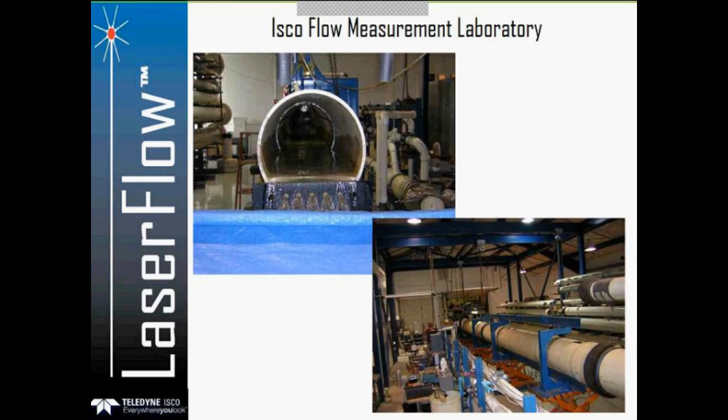So let's talk about area velocity flow measurement. Some of this will be review for those of you who have attended in the past, but it doesn't hurt to go through it again.

Area velocity: Q, your flow, is equal to the area of the water, normally determined using a level measurement technique, either a pressure sensor or an ultrasonic sensor. Velocity is your V component, normally done these days using a Doppler principle. Today we'll talk about a couple different types that Teledyne Isco has. One is what we call contact, which can be one of the older 2150 sensors or the newer 350 area velocity sensor, a smart sensor. We'll also talk about non-contact, meaning laser in this case.

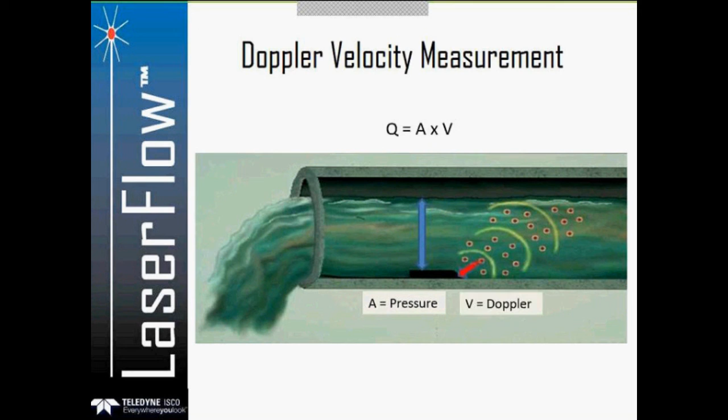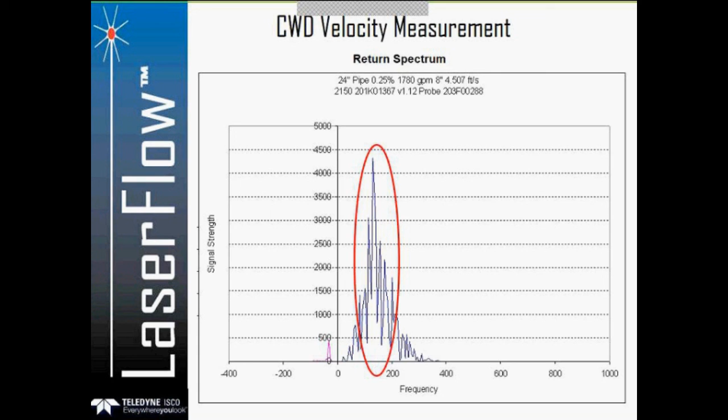For our Doppler velocity measurement, basically a sensor is on a ring in a pipe. We need to measure our level, which we do using a pressure sensor. We transmit using a continuous wave Doppler sensor, and what we get back is something that looks like this. You don't see that with the naked eye, but in the software you can see some of this - it's the frequency shift from what we're getting back from a continuous wave sensor. We trim off the front end and back end of that signal and do a weighted average of what remains. This has been a very good method for measuring water velocity and flow in a channel, but it does have some limitations, which I'll talk about in a minute.

The 2150 was designed to be a modular system, so you could stack up to 4 modules. If you had an application where you needed multiple sensors in one manhole, you could just stack up to 4 AV sensors or modules to do that.

All of our meters are battery powered, and can be battery or AC powered. We do not require you to buy our proprietary batteries - these are all off the shelf, either alkaline lantern batteries or even deep cycle batteries.

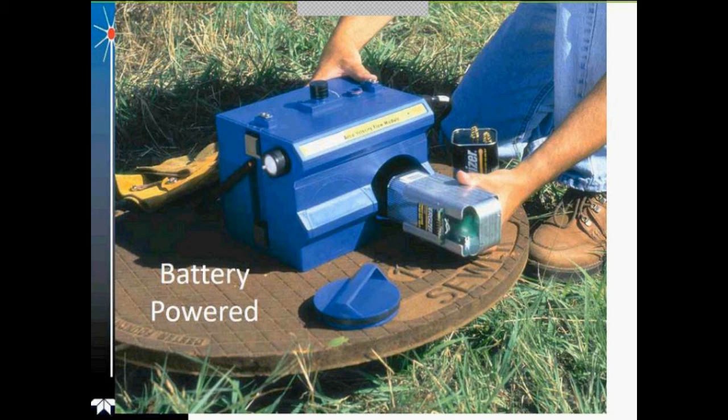Continuous wave Doppler: some of the advantages are that they work very well in depths typically lower than 24 inches. The signal of a continuous wave sensor gets scattered as it moves further from the sensor itself, so as you get deeper flow, your accuracy will decline. That's true with Isco, and true with anybody else's continuous wave Doppler sensor. For that reason, we know we'll be in the 5 to 10% accuracy range when depths are typically lower than about 24 inches.

Because we're shooting a shotgun pattern out, we get a good approximation of the velocity of the water. These are low power consumption units, can be portable or permanent, and are typically lower cost. Disadvantages: you have a sensor in the water, so there's debris issue potential, ragging, or damage to the sensor in cases of stormwater or CSO. Periodically, you'll have to calibrate those sensors.

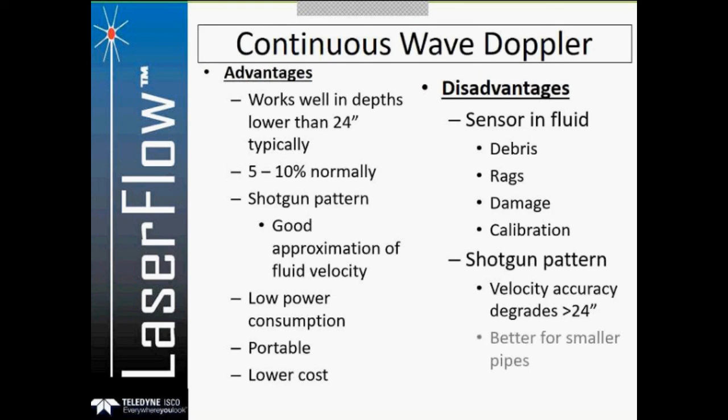We use, again, a shotgun pattern. It does a great job of giving you good fluid velocity, but it has limitations when you get above 24 inches. That doesn't mean you cannot use an AV 2150 or a 350 in a big pipe—people do it all the time—but you need to be aware that your accuracy will not be great when you're in a 10-foot pipe and 7 feet deep. For that reason, they're better suited for smaller pipes.

So that's the continuous wave sensor technology. Now I'll talk about the acoustic Doppler flow meter, or ADFM. Some of you are probably familiar with this—it's been around for quite a while. What it does is use a sensor with 5 different crystals on top. 4 of them measure the water velocity, and the one in the center measures the water depth.

If you look at this, this is a theoretical velocity profile, with levels measured right in the middle using an upward-looking ultrasonic. We're able to dissect the flow into multiple bin velocities to get a velocity distribution or velocity profile. These are probably one of the most accurate technologies we know of in open channel.

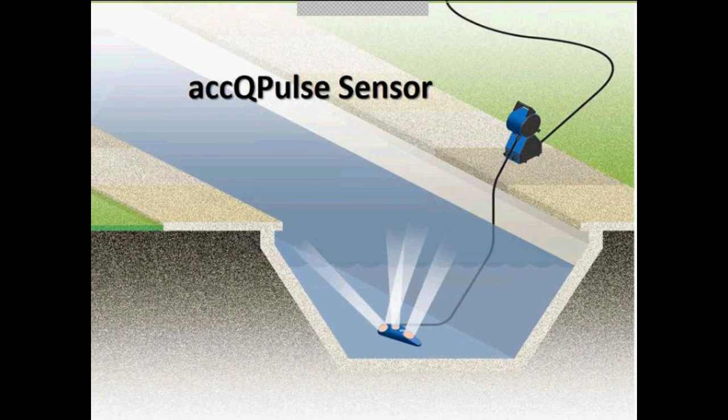This unit will eventually be phased out and replaced with new technology called the accQPulse. The accQPulse is a 3-sensor design as opposed to 4. It uses a forward-looking velocity sensor, transmits up through the water column, and dissects the flow into 9 different velocity bins in shallow water mode. When the water exceeds 30 inches, it goes into what's called deep water mode, and can do a much more in-depth velocity profile.

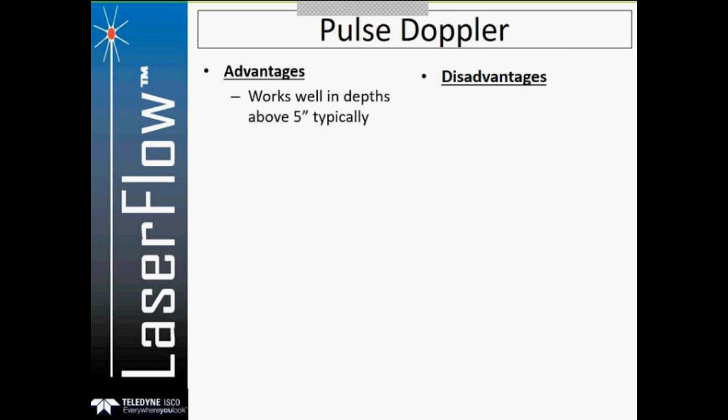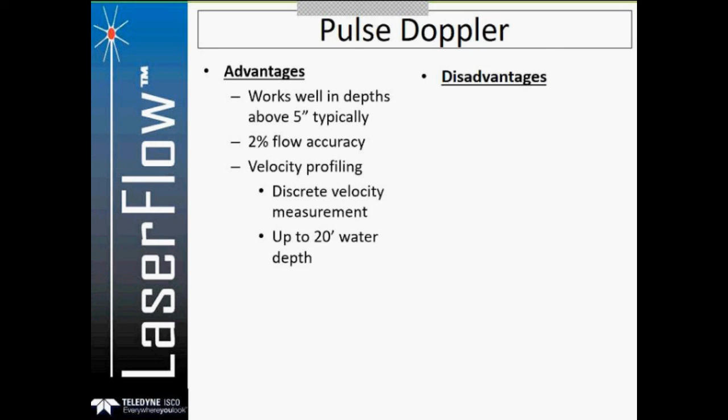Some advantages and disadvantages of pulse Doppler: you need about 5 inches minimum on the large pipe unit. The AccuMin, which is an AccuPulse with a small sensor, can read down as low as 3 inches. These are flow accurate to 2%, the best in the industry for open channel. They do a complete velocity profile using discrete velocity measurements—nothing else does that. They can read up to 20 feet of depth, both portable or permanent, and use a non-drifting ultrasonic level sensor.

No calibration is required. Once you set that thing up, you're pretty well done.

Some disadvantages: you have to have the sensor in the bottom of the channel. And when you do that, you have the obvious challenges: debris, ragging, potential damage to a sensor, and you're going to need a little more water flow. So you need at least 5 inches, preferably more than that. They're going to cost a little bit more than a standard continuous wave Doppler, and they're going to use more power.

All right, so that is Isco's contact sensor technology. What we're going to talk about now is non-contact. Why would you want to do non-contact?

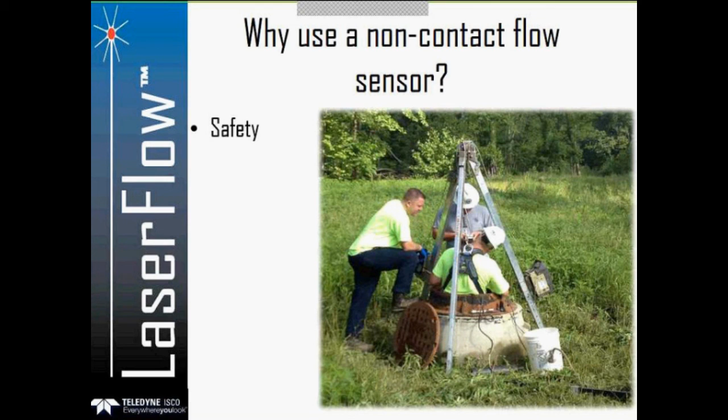With non-contact, obviously safety is a big issue. You don't want to be in that manhole any more than you have to. Maintenance is also a potential issue. Nothing's going to work if it's covered in this kind of debris.

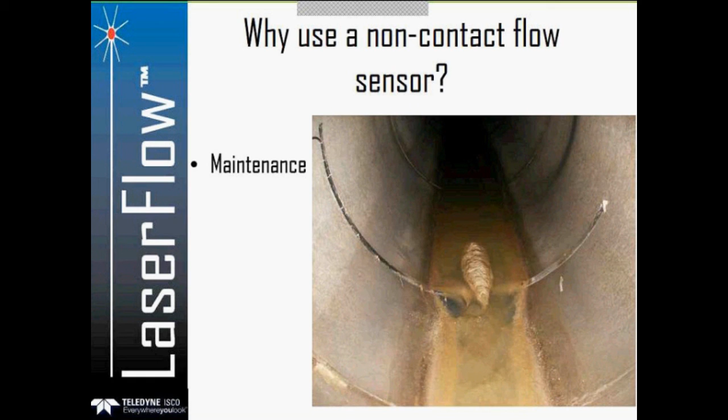So what Teledyne did is we developed a product that we feel will really unlock the door to a successful monitoring program, and that is called the LaserFlow.

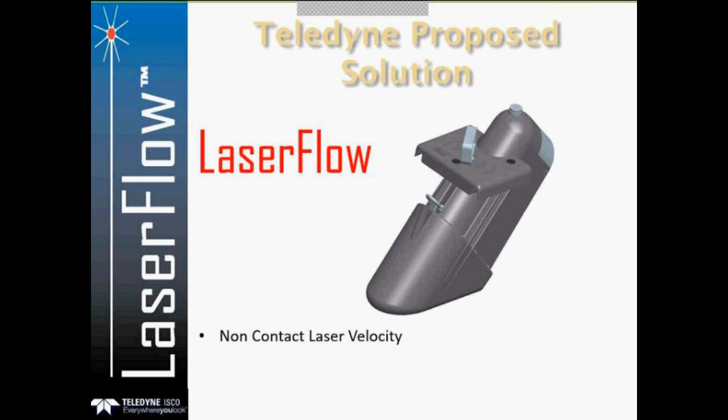The LaserFlow uses a non-contact laser velocity sensor, uses a non-contact ultrasonic level measurement technique, and then when it does become submerged, it uses a continuous wave Doppler sensor to read the surcharge.

So, the theory of operation: there is an ultrasonic sensor in the upper back that is at a slight angle. It transmits off a 22.5-degree deflector, knows where the water is. Once it knows where the water is, it focuses the laser beam below the surface of the water.

This is very key and unique to Isco and the laser. This is also a very patented feature. So nobody can read subsurface velocity measurement with the exception of LaserFlow.

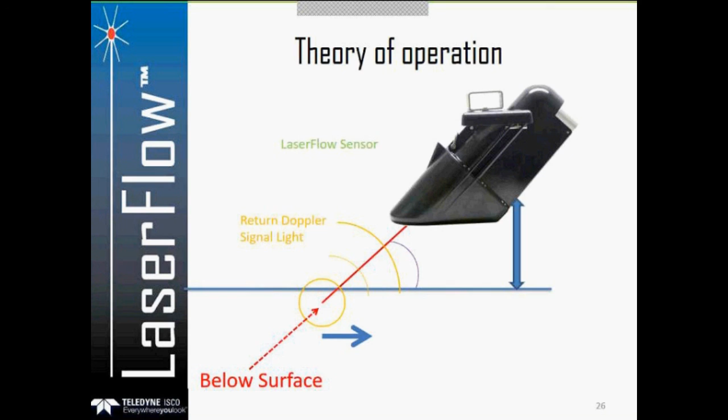Before I get into the laser operation, I'm going to talk a little bit about the ultrasonic. One thing we looked at when we designed this was what the other guys did well, and maybe areas that we can improve on our design. So one of the things was the ultrasonic sensor.

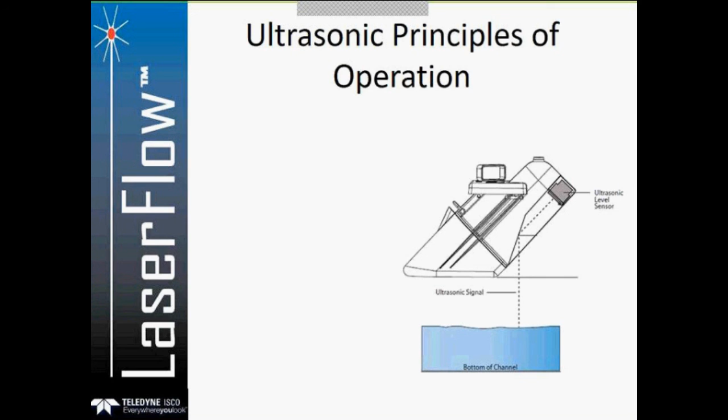If you have an ultrasonic sensor that's mounted looking straight down, you can have the potential for condensation to drip off the nose or face of that sensor. What we did with the LaserFlow is we angled it, put it in the back of the sensor, and now any moisture that accumulates will just run right off it, whether it's moisture in the manhole or becoming submerged.

We use, again, that deflector plate. One of the reasons we do that is any ultrasonic sensor will have a deadband, including ours, and that's normally about a 12-inch deadband. With this design, we've eliminated that deadband because now it's taken into account in the sensor position. We can read all the way up to when the laser goes underwater before it will hit the deadband of the ultrasonic sensor. We have a 0 to 10 foot range, so the thing can be 10 feet above the minimum depth of water flow.

So we did, I think, a really good job on the ultrasonic. Very rarely do you have to do anything with it. So water level comes up, submerges it, goes back down. It should kick right in and start working. Okay, so that's the ultrasonic.

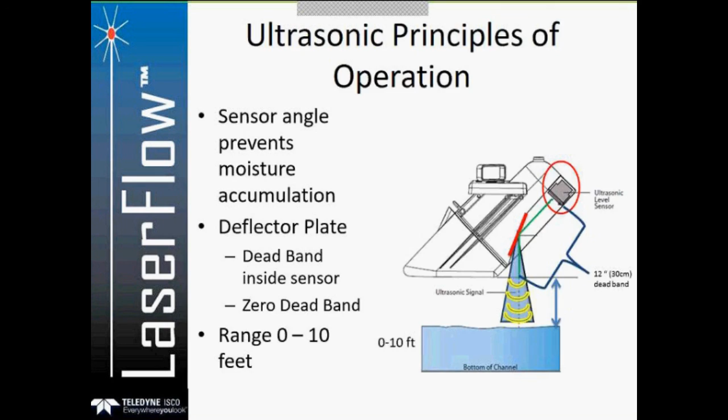The laser works kind of like if you took a magnifying glass and moved it until you got a small point on your hand where it started to burn. Very similar to what the laser does. We know where the water is and we focus the laser at the appropriate point. Any signal reflected off the laser will be looked at basically, but most of it will be weak and not even processed. So anything on the laser beam will be reflected.

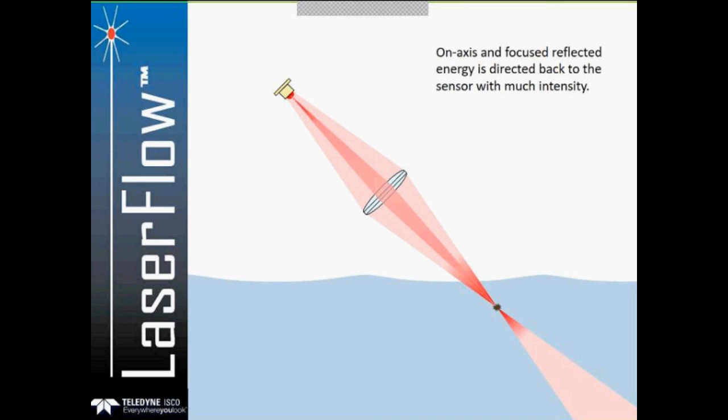What we are interested in is the focal point, where we are actually focusing the laser, where we get our maximum signal reflection back to the laser sensor. It works like any other Doppler device: we transmit a known frequency, we know the frequency shift of what comes back, and that's how we calculate the speed of the water.

So, to give you a better idea: front view, side view, we do a level measurement, we know where the water is, we focus the laser below the surface of the water. Where we focus that laser is known as the converging section, or point of convergence. What's unique about the laser is when we take that reading, we take 5,000 velocity scans in 2 seconds, so it does a very detailed analysis of what it's getting back in a very, very short amount of time.

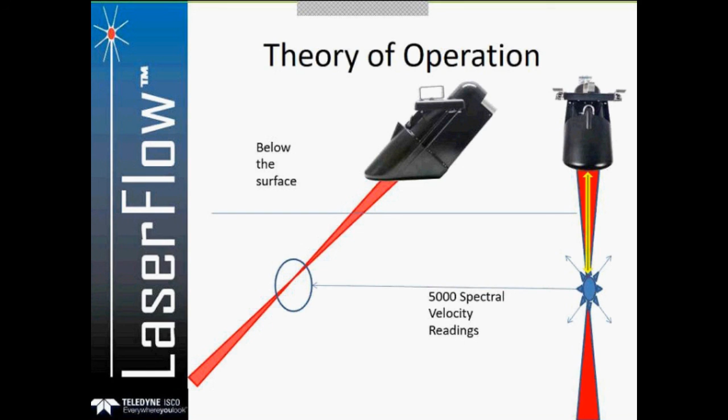For those of you that may be aware of Laser version 1, which was released about 4 years ago, that signal took about 45 seconds to process. We did some changes in the firmware and some other things. Some of the engineers did a great job, and now it does a lot in a much shorter time. So incredible what the laser does.

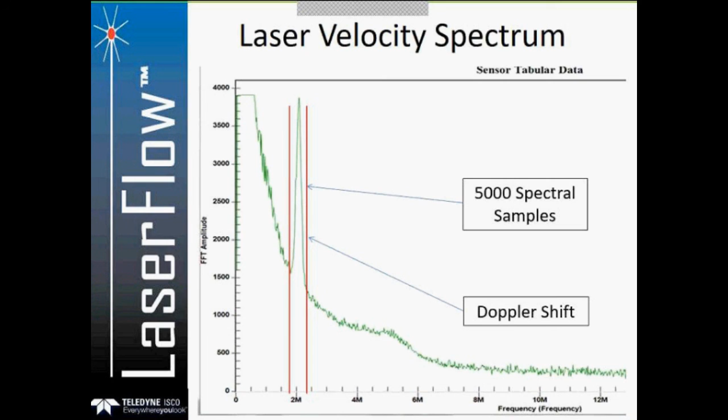We slice off front end, back end, and we end up with something like this. This is a new laser. If you got one today, your signal would look like this. What's key about this is our Doppler power, which is really a measure of signal to noise ratio, is incredible. As this water slows down, that peak you see would shift to the left.

The first version laser would not read below about 0.8 feet per second. The current lasers now are spec'd to a half foot per second, but in this case, we can read much lower than even a half foot per second—again, a measurement of the quality of the reading. This value, Doppler power, is stored as a data point, just like level or velocity. We need to see a value greater than 1,000 in order to consider it a valid reading.

So with any other Isco flow meter, we are really, really big into diagnostics. We not only want to give you a nice, pretty graph and a good-looking set of data, we want to verify and be confident that the reading you're getting is truly a valid reading, and the laser is consistent with that.

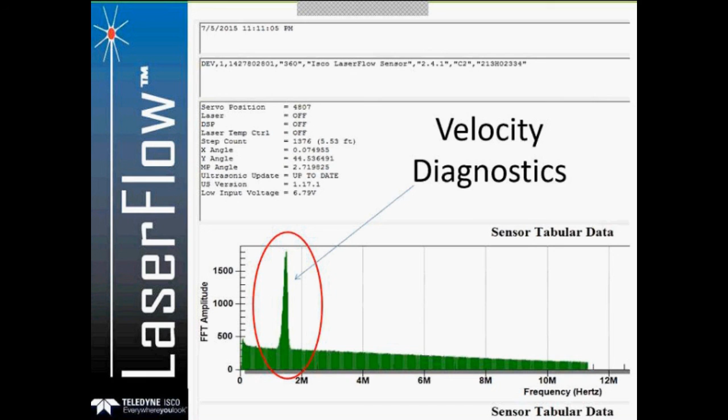In the case if it did go submerge, went underwater, water level comes back down—when I look at this diagnostic, I can see that I have no changes in the position of my sensor, and I also note I have a good velocity Doppler shift, so no reason to touch that laser. Just leave it alone. Okay, so how do we run this thing?

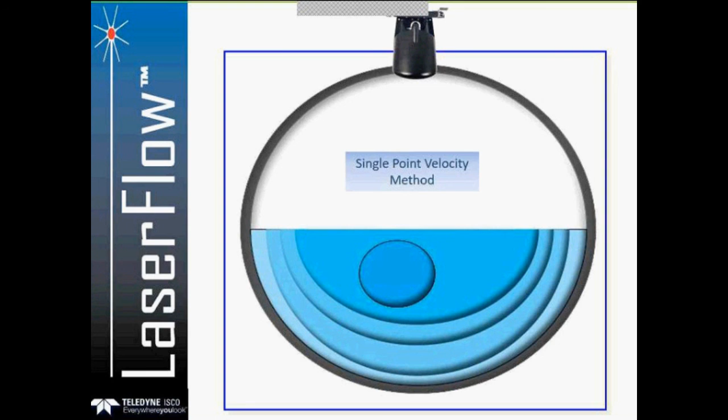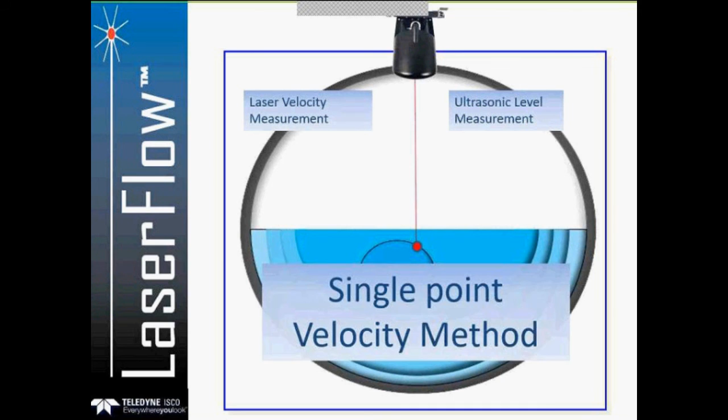It can be run multiple different ways, but one common way is what's called the single point velocity method. We read an ultrasonic level, so we know where the water is. Once we know where the water is, we focus below the surface of the water. At that point, we're taking 5,000 velocity readings.

The other way is we can take and measure multiple points. The laser can read up to 15 different points—5 points horizontal, 3 points vertical. Don't want to mislead anybody: this does not do a complete velocity profile like an ADFM. So if you have very irregular hydraulics and the bottom's moving one direction and the top 5 feet is moving the other, the laser will not see that.

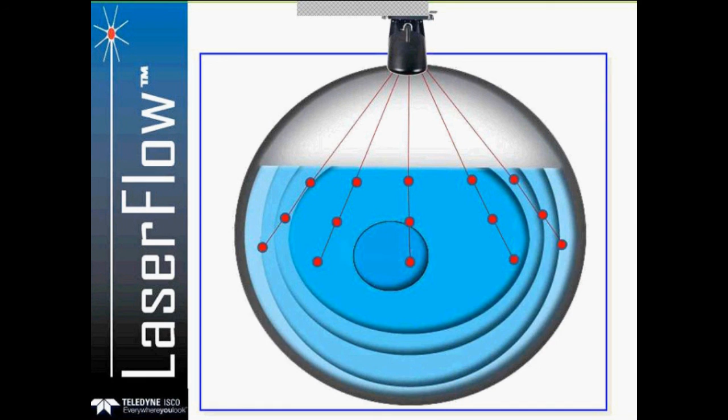So it's not going to read every application. But for the most part, in a normal hydraulic condition, your peak velocity is typically in the middle, just below the surface, and then as you get to the outer walls, it will slow down. This method is known as a multi-point, multi-depth velocity method.

So here's a site that I downloaded actually in Washington, Seattle last week, at an application where water was coming into a wastewater treatment plant. I turned on all 15 points, and you'll notice that the upper left—it starts upper left, moves across to the right—5.03 feet per second, and 4.71 to the right. Very uniform flow, so everything looks good there.

The choice for them is really power. You can run all 15 points. If you have AC power, then run them all—it doesn't matter.

In this case, they did, so we just left them all on. For billing applications, you may want to run all 15 points. If I have them on batteries, I may not want all 15, especially when it's as uniform a flow as this is. You may want to pick 2 or 3 different ones.

It's important to note that if you select 2 or 3, if they ever come up invalid, meaning they didn't like what they saw, they will not be processed and used for the velocity. It'll just be thrown out.

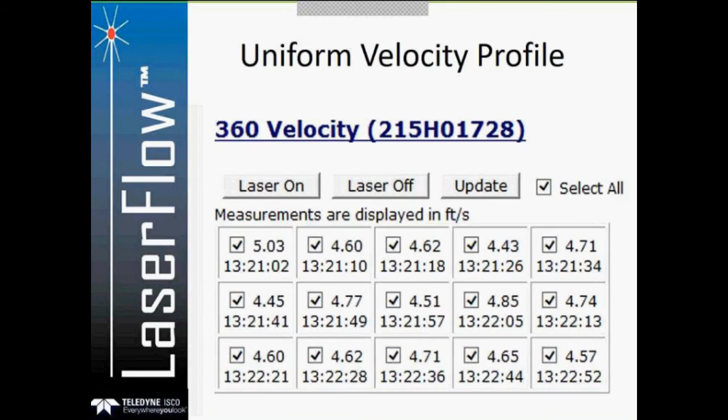So challenging. But if you had to do this, a laser is really the only thing that will give you this kind of detail. Okay, so that's the laser operation.

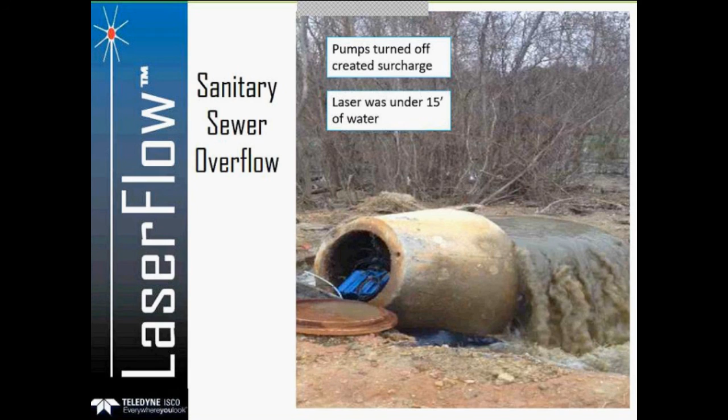Now we're going to talk about what we do when we go underwater. In this case, this was a sanitary sewer overflow. It happened because pumps at the wastewater plant shut off. The laser was under about 15 feet of water. It is rated 6 feet, 72 hours. We have lasers now that we don't recommend putting under 15 feet of water, but we do have lasers that far exceed the rating and have not leaked, so it's a very, very durable product.

So what we do is, once the laser becomes submerged, we have a continuous wave sensor like a 2150 or the 350 area velocity sensor. It is mounted upside down on the bottom of the laser face. So we read laser velocity and level until we become submerged. Once submerged, our continuous wave sensor takes over, and we read level and velocity using that sensor.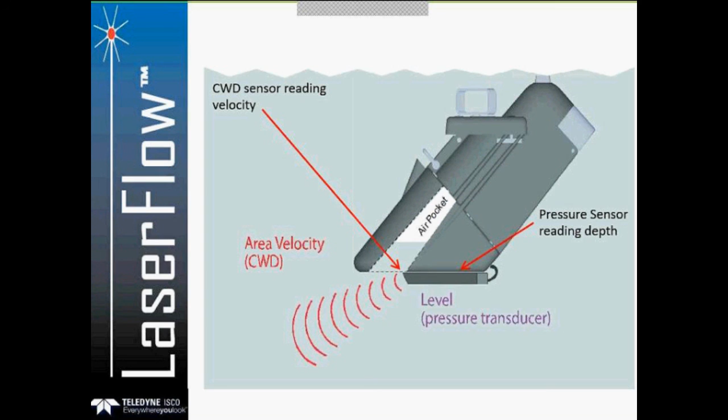All of our meters now that use laser have the ability to have a single output related to your flow. We call this a conditional flow output. What that means is it will use laser flow until it becomes submerged for an analog output or a data storage point. Once it goes underwater, it will seamlessly transition to the AV sensor. So now you have one signal regardless of which sensor you're using.

This is a site where early on we did some testing, and they went ahead and purchased one. At the front end of this peak, you'll see that's flow with the laser versus the flume. Very, very close, they matched almost identical. Once the laser went underwater, the AV sensor kicked in.

The flume actually started overflowing the sidewalls a little bit. Once the water receded, you'll see the red line as the laser flow, and the brown line is the flume. It took about 5 days before the submergence of the flume decreased enough where it started reading accurately again. So they had one signature meter processing both of those, giving them good, accurate data regardless of what was happening at the plant.

This is what the sensor looks like when it's mounted. It is retrofittable in the field. You can order it with this feature, or you can add it later. It's no big deal to do that.

Some of the ways that you can install this - a typical installation has just 2 bolts that hold the mounting bracket in place. There are alignment tabs on there, and those are designed so that once you get it installed the first time, you can pull the laser above without going into the hole, and put it back down without going back into the manhole.

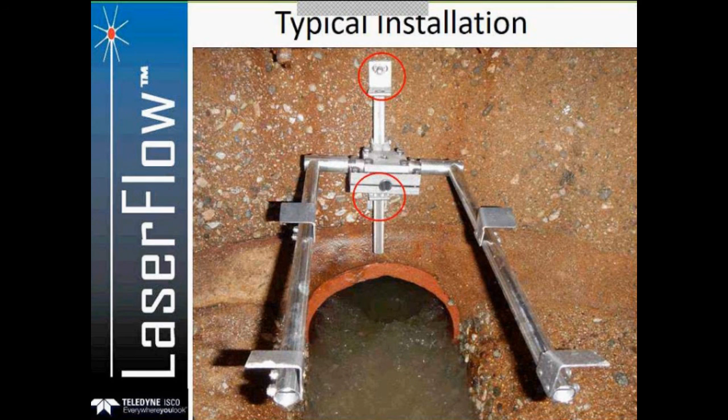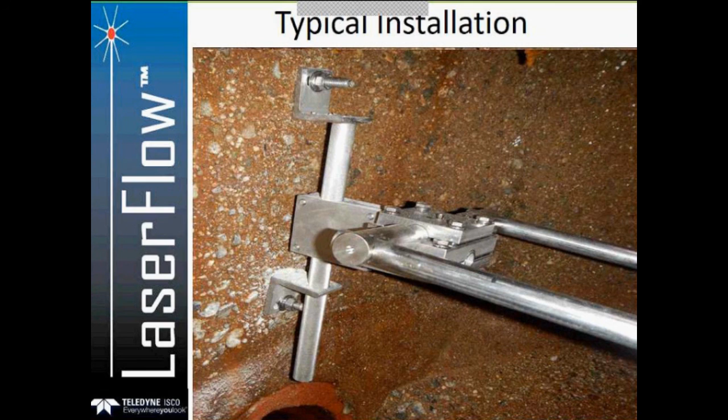This is a side view of the same thing, so 2 bolts, very easy to install. It is designed so that you can adjust the pitch and roll. You can also raise and lower the sensor. Normally you'll mount it at the crown of the pipe, so the sensor itself typically is mounted with the bottom of the laser close to the crown of the pipe. That way, if it does become submerged, your AV sensor is looking into the flow and you're going to get an accurate flow condition.

Okay, let's talk about some applications where we use laser. Collection systems, we define those typically as large pipes. When we first came out with laser, that's what we were thinking a real target was, large pipes. Since that time, we're finding a lot more small pipe applications.

So again, collection system, typically you're going to see some large pipes, billing applications. City of Atlanta, some of those big cities use a lot of these for billing. Hydraulic model calibration, that's another big one that we're seeing more and more of.

Hydraulic models typically are involved with large interceptor lines, and maybe a lot of those you can't even get into the flow, let alone install a sensor down in the bottom. So you need a high accuracy, but you don't want to get into the flow.

Stormwater, we're seeing more and more stormwater applications where lasers are being used. They can read extremely clean and very, very slow flow. That is one of the latest things on laser that I've learned over the last probably 6 months, how clean a water laser will read and really how slow it will be able to process a velocity reading.

Wastewater treatment plants, more and more wastewater plants are using lasers. Nobody wants to get into the influent and the effluent as well. So influent, effluent wastewater plants, grit chambers, things like that where you don't want to get into the flow.

We've done a lot of testing over the last year and a half, comparing laser to some standards to be able to say here's how accurate. Everybody wants to know how accurate you are. What we have here is a tow tank test done with USGS HIF lab, and you'll notice that the laser, in every point that we tested, was within 1% of the tow tank. So it did really, really well in the lab.

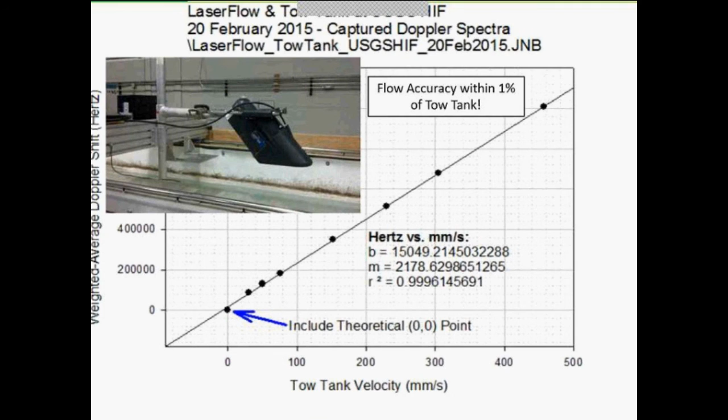We have other test results from other independent labs like the Cal Poly San Luis Obispo irrigation facility and some other things. So we can certainly provide some amazing data. But all the lab data in the world is great - what you really want to know is what's it do in the field.

So we ran the laser in series with a number of different types of technologies. This is a multipath transit time meter. What this has are multiple sensors on a ring that basically transmit across and talk to each other. These are known to be very accurate technologies.

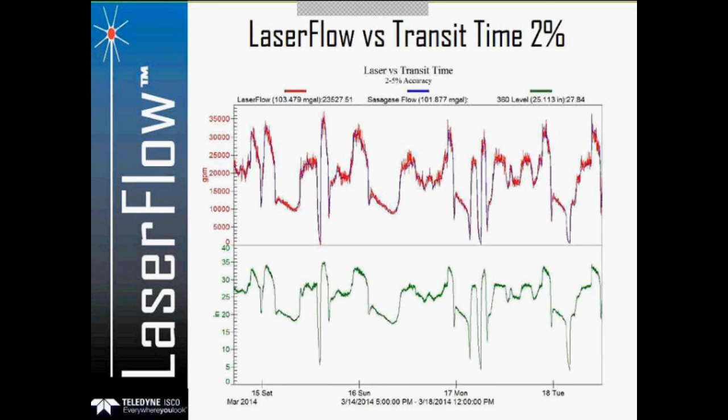This was a test done in Japan comparing to a transit time meter. The top pane is flow rate, red is the laser, blue is the transit time meter. The bottom pane in green is the level. So it didn't matter if the level was 5 inches or 35 inches, they tracked well within 2% of each other. Okay, so that was transit time.

We talked about acoustic Doppler or range-gated Doppler earlier, and we've done a lot of testing on this as well. This is the accQpulse versus the LaserFlow. This was done with City of Omaha, and you can see in the top pane, blue is the accQpulse, red is the laser, is level, velocity, flow rate.

The bottom pane, again, is what you're really looking for. We were well within 1% of the accQpulse. So it did very, very well. If the hydraulic conditions are uniform, they match very closely.

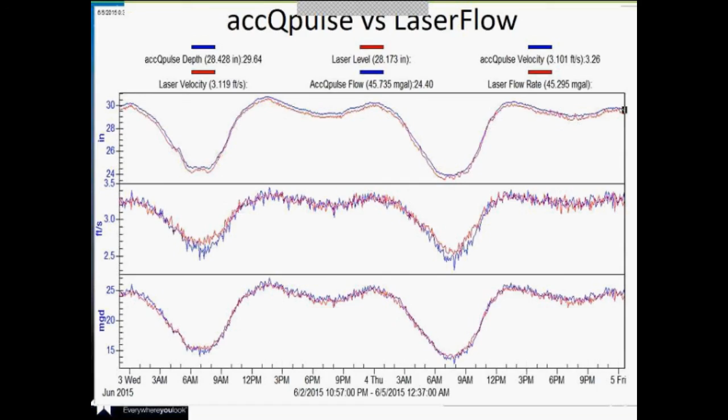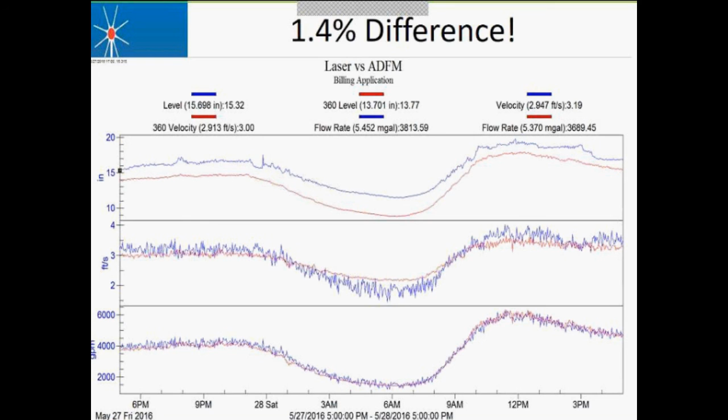This is another test we did. If you look at this data, we were within 1.4% of the ADFM. Again, different actual pipe sizes, so there's a little bit of difference in the hydraulics, different flow patterns, a little bit of difference in the velocity as well as level, but the flow output was identical.

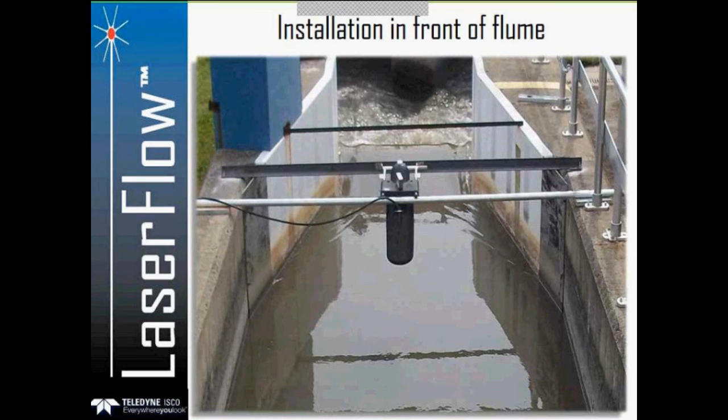We've tested in applications where we've compared to flumes. More and more people are questioning the accuracy of the flumes. I will tell you right now that the more I work with the laser, the more I'm confident that in the next year or two, people will be using the laser to verify their flumes are reading accurately. A lot of things happen with flumes: the approach velocity is too high or too low, the size of the flume is wrong. Other things can make a flume not necessarily the most accurate device.

In this case, they had a signature meter using an ultrasonic to measure the level of flow in the flume, and they use the laser upstream. When it submerges, it automatically switches to the laser. This is the flow data between the flume and the laser, tracking very, very close. We all, I think, agree that flumes can be within about 5%. In this case, they track very, very close.

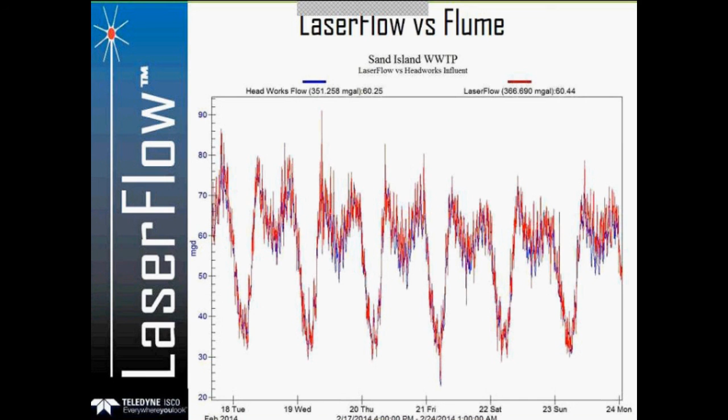Flexibility. Some of the things we do, again, is signature, our smart device. This signature flow meter will allow you to connect multiple sensors, up to 9 technically. In the case of laser, we'd probably hook up 2, maybe 3, but normally no more than about 2 lasers on one. But it gives you a lot of capabilities. We can take in other technologies that have Modbus output, analog outputs, and so on.

But the communication side of the signature is impressive. It can transmit data using a cellular modem. We can also allow you to download using a USB or a thumb drive. You can use internet, again, to call up the site, analog outputs. We have alarming capabilities and so on. So very impressive, that's the signature.

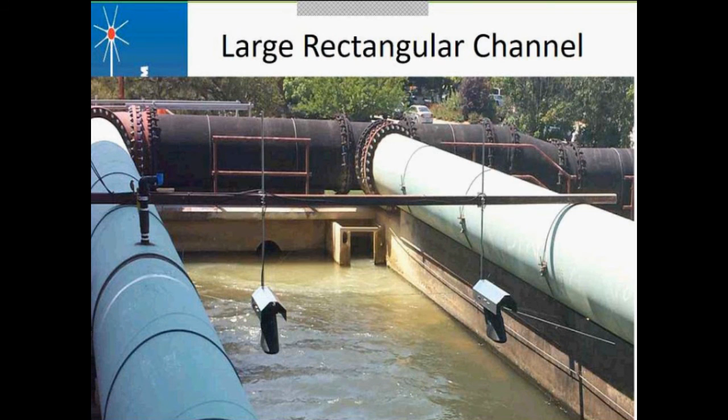This application is a large rectangular channel. This was actually a drinking water facility in Kansas, and they knew their flows were not very uniform. It's about 20 foot wide, so they went ahead and installed 2 lasers, both kind of splitting it in half. We set the flow conversion up so one sensor has 10 foot, the other has the other 10 foot. Both of those are processed in the signature and give you one continuous output for both. So you can average those, add them together, whatever you want to do with it. Very powerful tool in these types of applications.

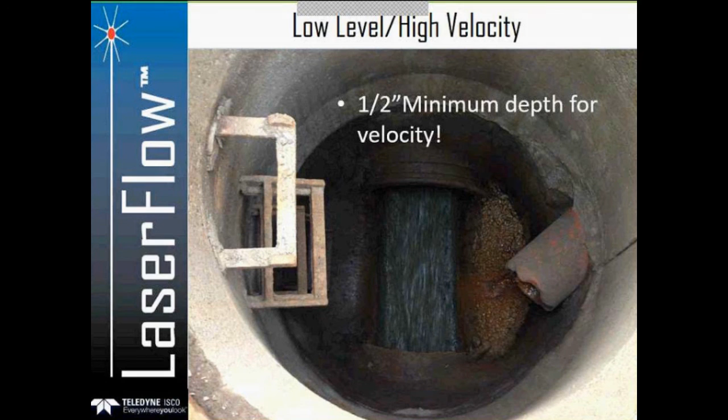Low level, high velocity, more and more of these types of applications. It's very, very difficult, if not impossible, to install a pipe or banded sensor in this type of application. Currently our spec is a 1/2 inch depth for velocity, although we will read, in the case of the laser, as far down as it can read level. So it's going to read down - in a lot of cases I have them below even 1/10 of an inch of level. Our current spec is 15 foot per second for your maximum velocity.

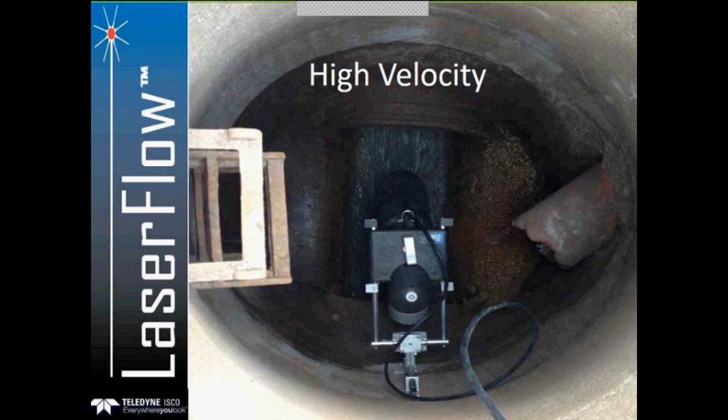The way they did this in this particular location, this is actually Duluth, Minnesota, very high velocity, low level, almost impossible to read. They went ahead and put a laser in there. The laser doesn't care if it's pointed upstream or downstream. It can mount on the front wall or back wall, so very flexible as far as installing. Once you put this in, you know the XY axis, you know if it's installed correctly. There's also a bubble level in the back, so very, very easy to install, much easier than installing something in the pipe.

This is some data from a site in Colorado. What's interesting about this is the level in this pipe is about 21 inches, and the velocity is screaming, 11.26 feet per second. This is a very difficult, if not impossible, site to measure without using laser.

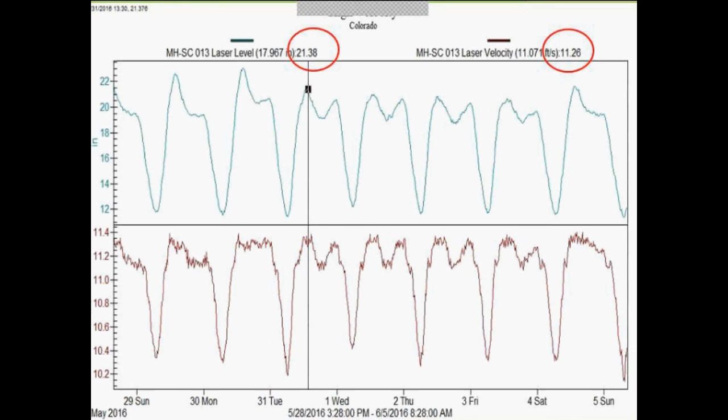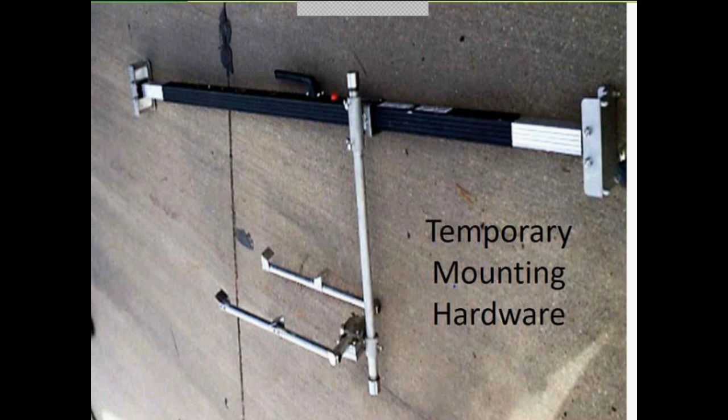This is a temporary mount. This is a hydraulic mount that we use. If you want it to go temporary and don't want to drill any holes, you can just crank that out. The sensor mount is at the bottom there.

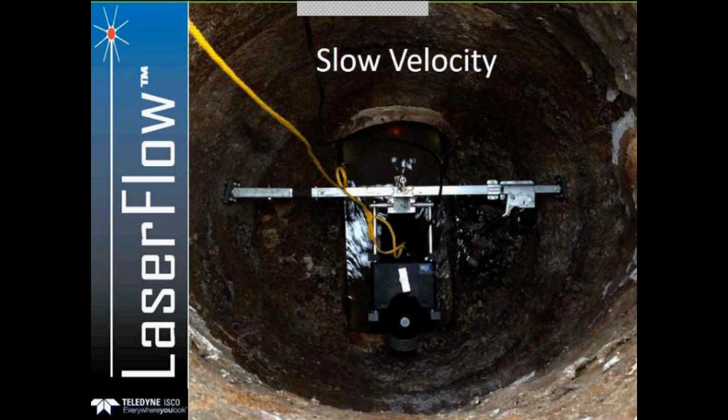This is one where they used a competitor's mounting device, but what's impressive about this is the slow velocity that we're able to read with the laser. You can see the laser beam on the water itself. Our spec is a half foot per second, which is where the dashed line is. In this case, we were reading down to 0.39 feet per second velocity, very, very slow.

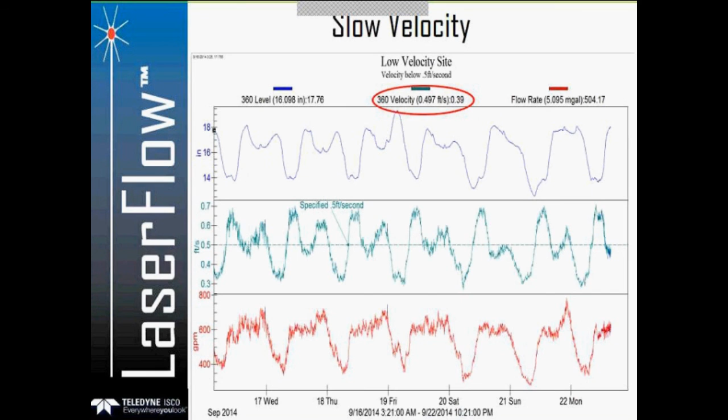Stormwater. This is a site out on the East Coast. The customer was struggling to try to read this. This is stormwater, the water is crystal clear, and it is barely moving. There is very low velocity, very little particles in the water, and very low level. We put the laser in. You can see the beam on the water right there. This is actually a 72-inch pipe. And what you'll see in this case is that particular point right there, my reading is 0.76 inches at 0.26 feet per second. So just a crawl of velocity and below 6 gallons a minute.

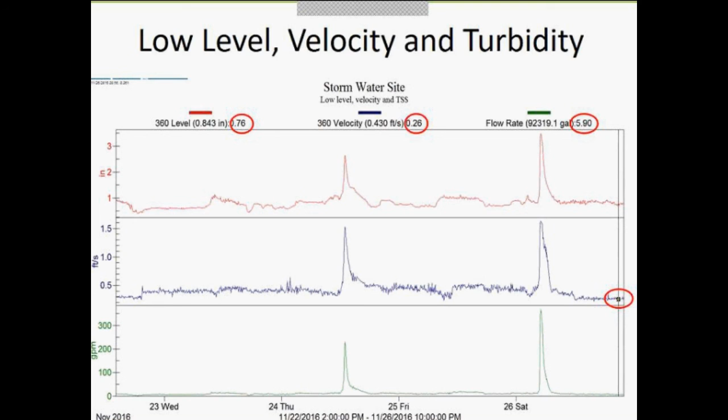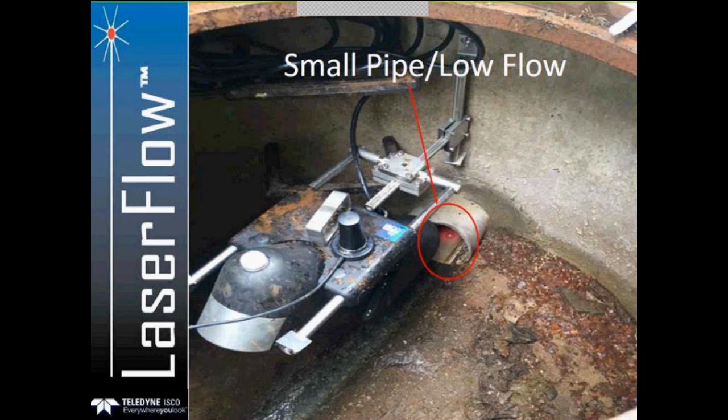Amazing what the laser is able to read. Here's another one, a billing application, very small pipe. We don't care if it's 6-inch or 4-inch, we just need to see water. And again, in this particular application, you can see the laser hitting the flow, but there's not much water going through this. So it may seem like overkill sometimes, but if you have an industrial customer that wants to measure flow and doesn't want to mess with it, just put it in and be done with it, the laser is a great solution for that.

This is some of the data from that site. The level in that dashed line is below 1 inch. Velocity is anywhere from 2 to 6 feet per second, which is incredible. In this case, when I looked at the data, I wasn't sure how accurate it was. My Doppler power value was greater than 1,000, at 2912. I know with confidence that the reading it took right there is accurate. And the flow rate, amazingly, was less than 1 gallon per minute. Unbelievable that it's able to read that.

Okay, another application challenge: drop pipe. This is a customer wanting to measure flow in this pipe. So as you probably recall from my training just a few minutes ago, your level normally would be read below the laser, and it would try to read velocity in the pipe. That wasn't going to work so well. So engineering came up with a solution where we can actually remove that sensor. You order it that way, and we put the ultrasonic on a horizontal mount that now will read in the pipe, reading the level and velocity in the same location. That's going to do a couple things.

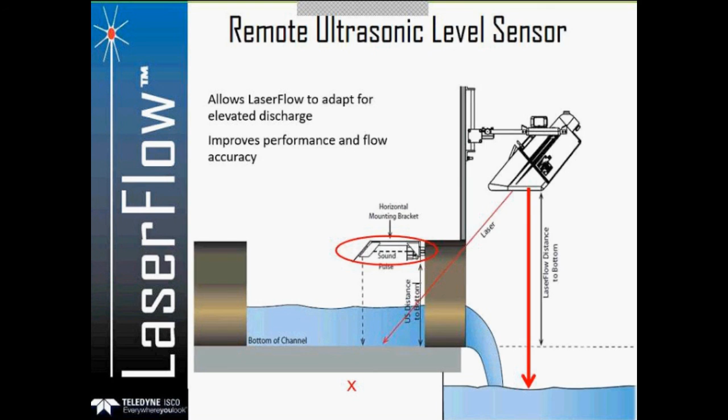It's going to allow you to read those locations, but it's also going to improve your performance and accuracy overall. This is a site with a combined sewer overflow. You'll notice the water is kind of flowing out and dropping a little bit. With the first laser, it would have tried to read below it, and not working well with a lot of water there, it would have had some problems. We use the remote ultrasonic, and now it's able to see the level in that same location.

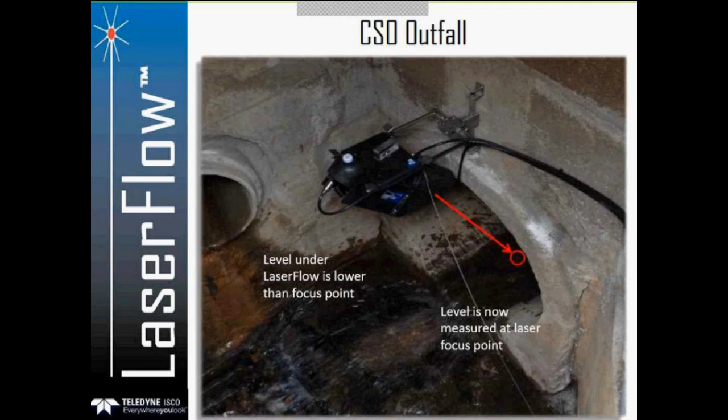This is a big pipe. You'll notice the water free falls out of that, but then it comes into a big irregular channel, so we've got a very undefined location. What they did is they used the remote ultrasonic mounted up in the pipe, and now they're reading level and velocity in that round pipe where the hydraulics are much, much better.

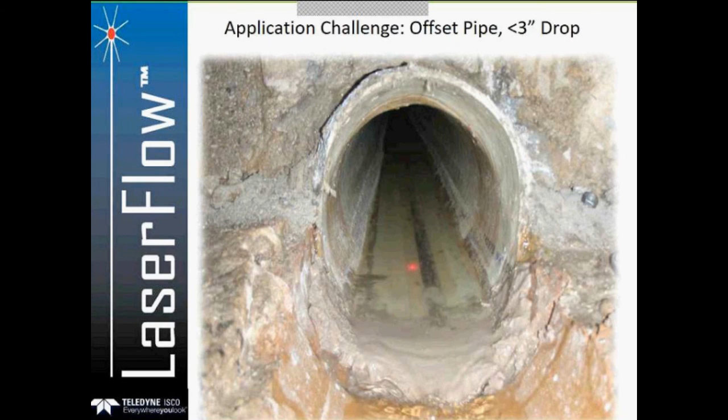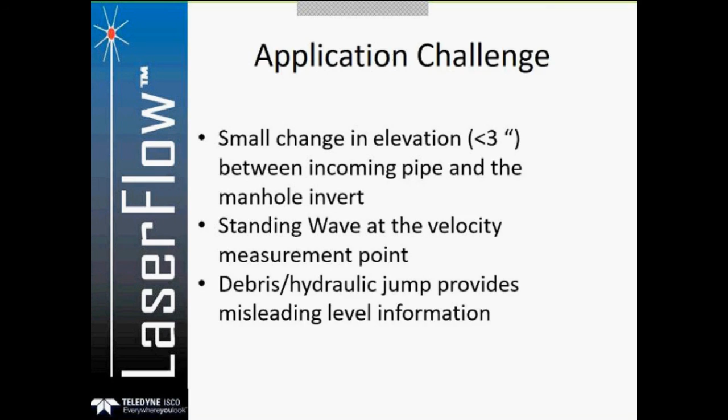If you have a condition that looks something like this, where they have a grouted pipe with maybe low flow, the laser wouldn't work so well. Basically they had a 3-inch change between what was coming into the pipe and the invert. They also had standing waves and other hydraulic issues. So the laser has the ability to do what's called adaptive focus. It knows where it would normally look for the flow, but it will scan 3 inches above that point all the way through until it finds its strongest signal, or the best signal. So it has a lot of intelligence for cases where you're struggling to get a good reading.

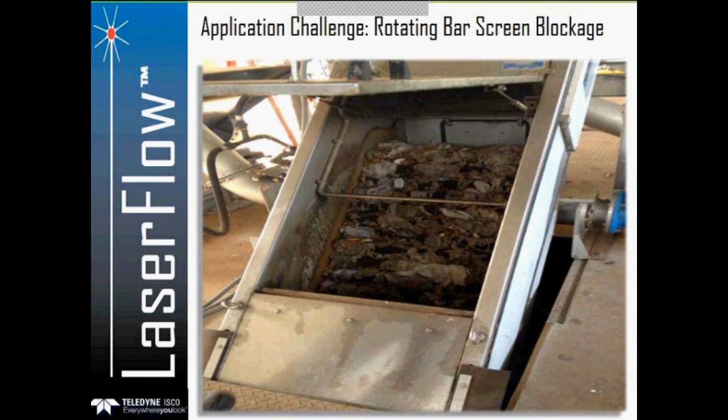This is another application where we had a rotating bar screen, influent of wastewater plants. Like I said earlier, we're seeing more and more applications where people want to do non-contact coming into the plant. This particular one is a 72-inch pipe, and the level change is 3 inches in 1 minute, so lots going on in a very short amount of time.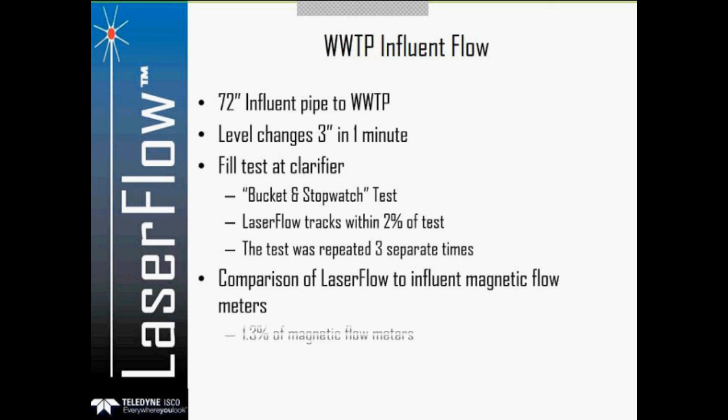They verified accuracy using the old bucket stopwatch test. They drained a clarifier, timed how long it took to fill it, and repeated that test 3 times, and every time it was within 2%. They also compared it to the influent mag meters and were within 2% of that as well. So, very impressive test. The level here you can see on top is changing 3 inches in 1 minute, so a lot's happening again in a very short amount of time. The velocity you can see is going up and down as well, and the flow rate.

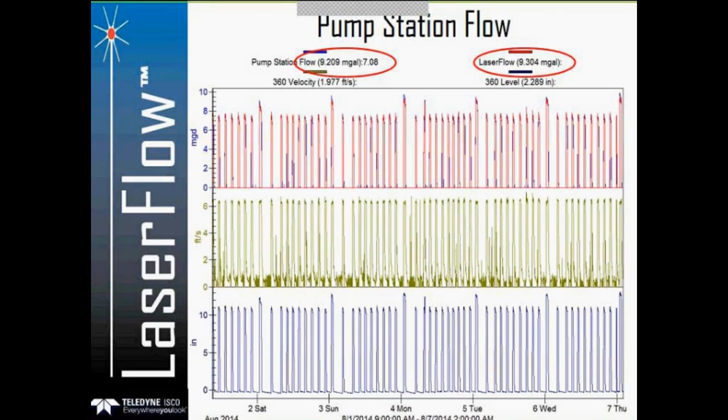We also had some tests at a pump station application, this one in Wisconsin. The customer put it on a constant speed pump station where it pumps on, pumps off. The interesting thing is the bottom pane is the level - it goes from 0 to about 12 inches with a snap of a finger. Velocity goes 0 to 6.5, 7 feet per second. But what's so impressive is the top pane, which is the flow rate, comparing to the mag meter. In blue there was 9.2 million gallons; LaserFlow was 9.3. So it's just amazing how close those two followed each other.

Okay, so let's talk about advantages and disadvantages. The laser is non-contact - nobody does what the laser does. 5,000 velocity readings in 2 seconds is just incredible. The multi-point velocity method is another thing where people who have used other technologies such as surface radar really love this capability of the laser. It will tell you exactly what's going on in those channels. We don't care if it's a large pipe or small pipe. It's always been taboo in the past to say one meter works in every application, and that still is true to a point, but I can tell you the laser is the most versatile, one-size-fits-all technology that I've ever seen in the 30 years I've been doing this.

We spec 4% accuracy for non-contact, so it's the highest accuracy spec non-contact available on the market. We do have tests that far exceed or are even better than 4%, but that is our spec. We don't care if it's a half inch deep or 120 inches - we will adapt to those conditions, so we do not have a decrease in accuracy. The laser will read the slowest velocity of anything I know of. Even though we spec a half foot per second, there are applications where we will read far below it, to the tune of less than 0.2 foot per second velocity.

Portable or permanent, doesn't matter which one you use, it uses a non-drifting ultrasonic. So really, when you put a laser in, you're done. You put it in, set the level, make sure you're getting good Doppler readings, the signal looks good, and you can monitor that remotely.

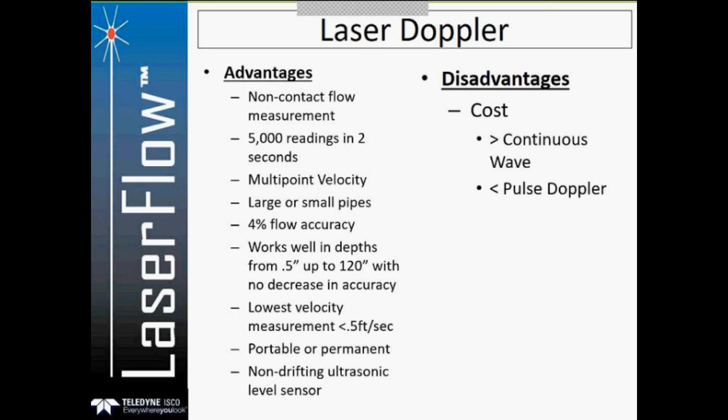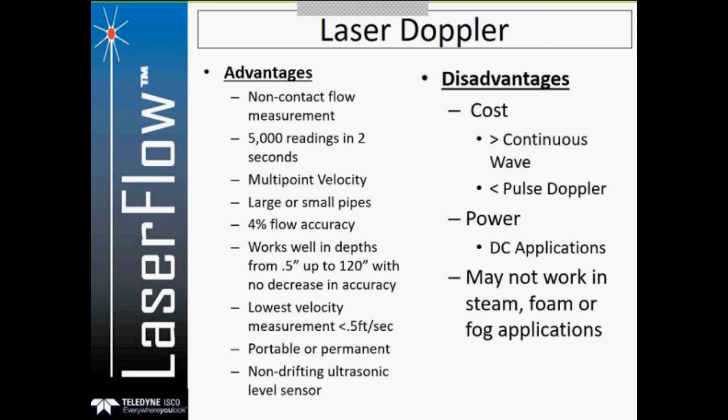For that reason, you never have to really get back into it. It's going to cost a little more than a continuous wave sensor, but less than pulse Doppler. So if you don't have regular velocity profile conditions, you may want to consider using the laser. It takes a bit more power, so for DC applications you may want to use a deep cycle battery. It may not work in some foam or steam applications, high fog—anywhere you think you'd have problems with an ultrasonic, you might want to consider that as a good guideline.

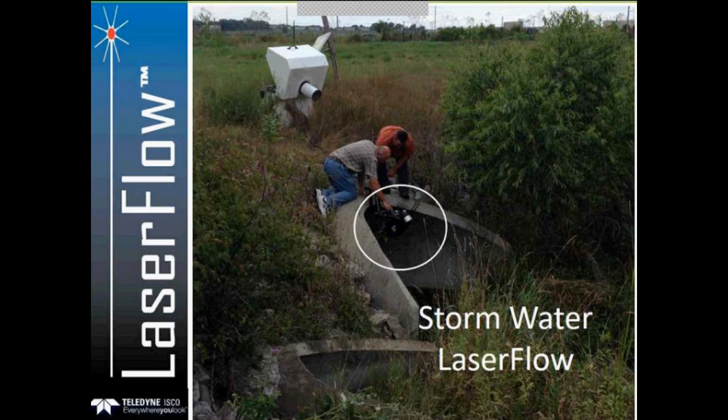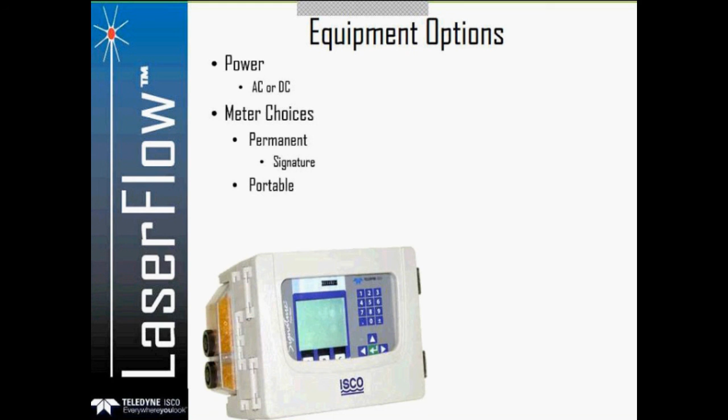Flexibility, we talked about that—laser gives you incredible flexibility. Both designs can be remotely communicated with using cellular communications, whether it's signature or a 2160. They get up, take readings, and are able to transmit the data to a central database.

The way we do it is a little different than probably some of the other ones out there. We allow you to go ahead and own FlowLink Pro, so you can buy the software. You host your own data, which means you spend the money up front, which isn't that much. You put it on a SQL or Oracle database, and the meters in the field transmit to your database. You have full control over it—you own your own data.

We don't hold you hostage for a 30-day fee like some other people do. Data goes into your database internally. Engineering people who have FlowLink on their computers can just access the FlowLink Pro database at the same time. Remotely, you can use VPN to log in and see what's going on. And now you'll be able to use remote communications to either pull up data on the internet, called FlowLink Global, or call into the site. So very, very powerful, what you're able to do with the communications.

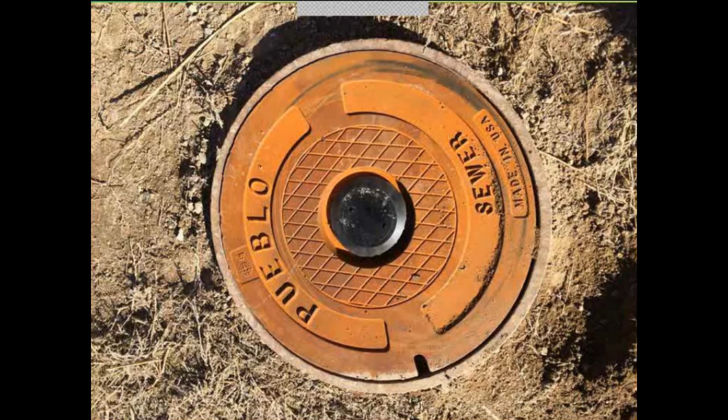This is an example of some creativity. This was Pueblo, Colorado—they had the manhole lid actually machined this way, which I thought was very neat, so they recessed that antenna so a snowplow can go over it without damaging anything.

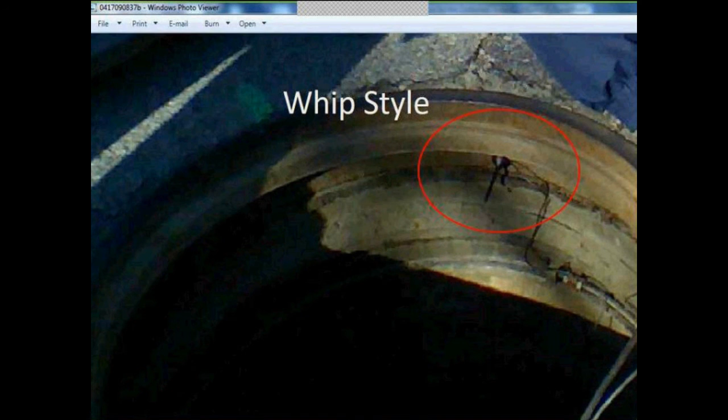One of the older style whip antennas—we have a lot of people who use the magnetic whip antenna, which comes standard with it. I'll show you what that one looks like; it's a little different than this one. But if you have a good cellular tower close by and you're getting good signal, a lot of times that will work—you don't even have to have the antenna extend out of the manhole.

This is one where they do have a manhole external antenna—that's known as a manhole antenna design. This is a blade antenna, which is a very neat thing; it's either epoxied right to the lid or has adhesive that glues right on top of it.

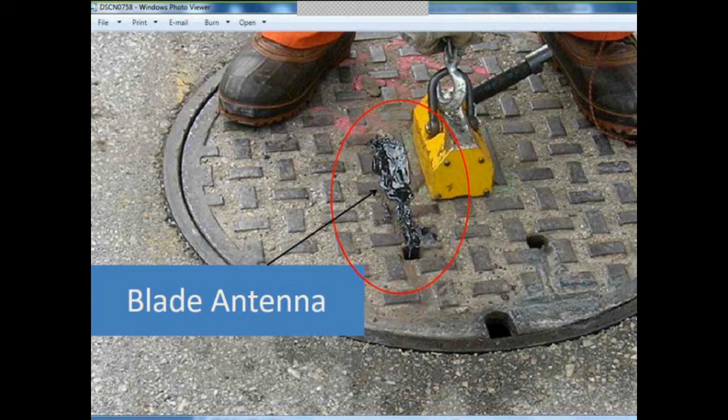This is one of the magnetic antennas that comes standard with the 2103 CI or 2105 CI, and it's a dual band antenna. In this case, City of Omaha just glued it or stuck it right to the top. Milwaukee used a blade antenna here years ago for testing, and they just epoxied that whole thing right to the lid of the manhole. Okay, so wrapping up here a little bit.

Once you get that data, one of the nice things is being able to pull it up on the internet. This is known as FlowLink Global. It allows you to log in with your own username and password. You go to the internet, anything that has internet access, your cell phone, whatever, can log into that. Once you log in, a dashboard view will pop up.

What this does for you is give a real quick glance at the status of your manhole or your monitoring project. Green means good, all conditions are normal. Yellow means it did not communicate in the time it was supposed to push data, so not a hard fault, but it's saying there was a little bit of a problem getting data to you at some time. Red means a hard failure. That can be anything any of our meters store.

Level, high level, low batteries, bad signal on a 2150, bad Doppler power on a laser, high temperature, any of those things you can alarm off. So you can have the meter in the field sending you an alarm telling you you have a condition, you get a text message, you pull up your cell phone and think, what's going on? You can easily look at FlowLink Global and assess the situation right there on the site.

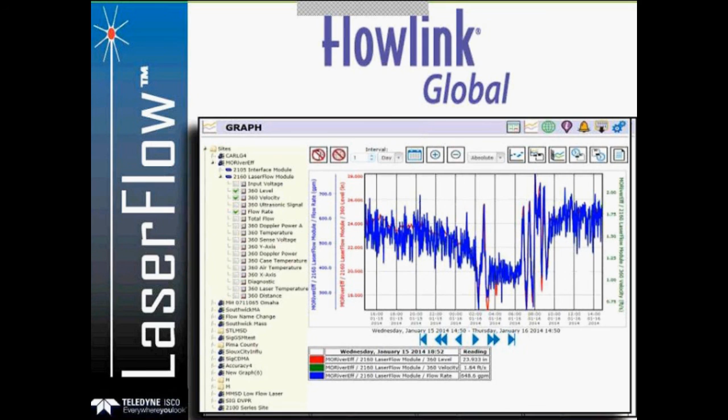You can also single click with FlowLink Global and get a graph. So now you can see not only level, velocity, flow, you can click on anything the meter stores. I can look at input voltage, I can look at XY axis to see if my sensor may be shifted. This all uses GIS mapping.

So now you can put in the coordinates and pull up a GIS map if you'd rather look at that view, which will tell you exactly what's going on at those sites with just a quick glance. Flow service companies find this very useful because you can do a study for City of Austin, for example, and then they can see only their data. They don't get to see everybody else's, but you can pull up a quick graph and see what's going on at their locations.

In summary, Teledyne Isco really has a solution for almost any flow application you can run into. LaserFlow is the most versatile and advanced technology I'm aware of, and I become more impressed every day. I look at data from this thing all the time, and it is absolutely mind-boggling what it's able to do. It can read the slowest velocity of any technology I'm aware of, far below even our spec in certain applications, not every one, but most applications it'll read down in the 0.1 to 0.2 foot per second range.

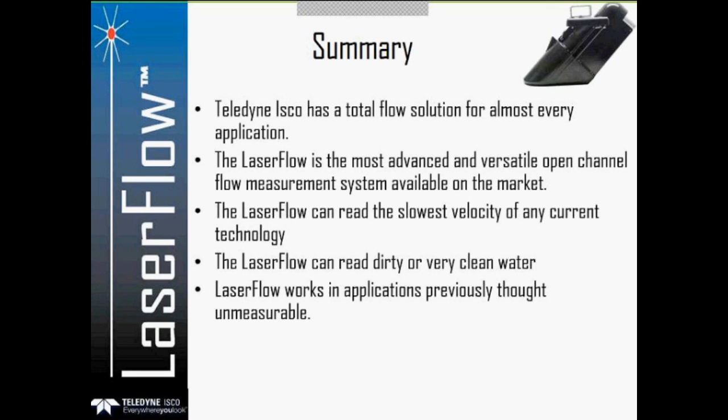Our spec is 0.5. It can read dirty or clean water. I get asked this a lot: how dirty can it read? We were reading at the influent of plants, we have them in wastewater plants. Worst case, a laser would read the surface if it couldn't get in there, but you'll know immediately when you set it up how well it's able to penetrate that flow. It can also read extremely clean water, because its signal is so clean, there's just not a lot of noise. It doesn't take very much for the laser to pick up a reading. For these reasons, it's working in applications where people have never been able to measure flow before. Just amazing what it's able to do.

Now that you have this wonderful technology, being able to pull it up on the internet is certainly a very valuable tool, and that is, again, FlowLink Global.